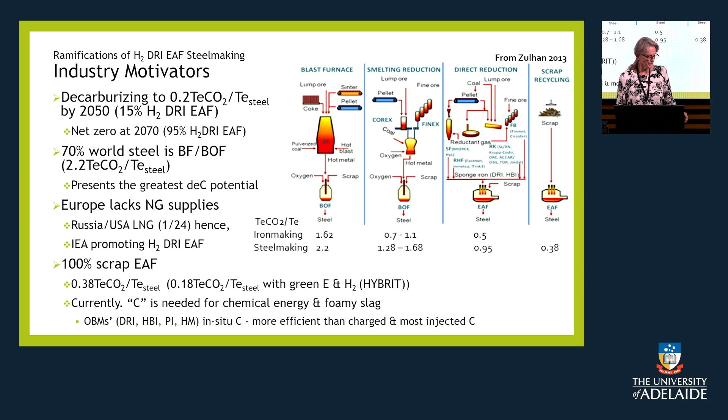100% scrap EAF is challenged moving forward because of the availability of good, clean scrap. So the motivators are producing clean steel through an EAF. There are a lot of blast furnace operators who will challenge whether it can actually be made through an EAF.

You need to maximize scrap to keep your CO2 levels down, and your prime scrap, as you can see from the bottom chart here - the obsolete scrap is going to grow significantly over the years, predominantly because China is going to be dumping between 40 and 500 million tons of scrap into the system, with the requirement to reduce the residuals that are going to be increasing with continuous recycling of the scrap.

We're going to need to use DRI, HBI, and pig iron to basically dilute the residuals coming through in the scrap. The problem is that you're going to have an increasing amount of CO2, as you can see from the middle chart.

As you increase the percentage of the OBMs, you're going to increase your amount of CO2. And pig iron, of course, is a clean source, but that's going to drop from 1.35 billion tons down to about 0.2 billion tons moving forward. So the question will be whether there'll be any pig iron.

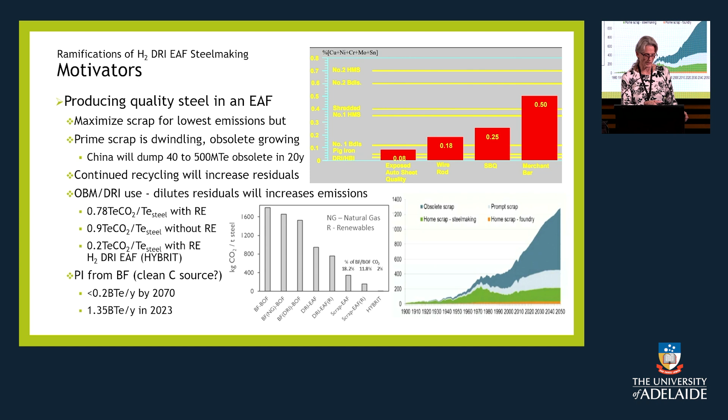It reduces the FeO in not only the DRI that's being fed in, but also the slag. And you can see that it will also decrease the consumables and the cost of making steel.

The in-situ carbon that you find in the OBMs is much more efficient, 95+%. When you've got the injection or charged carbon, you're only getting between 24 and 76% efficiency most of the time from those being added. It's also being added using carrier gases, and you also have all of the sulfur and the bad entities in the carbons.

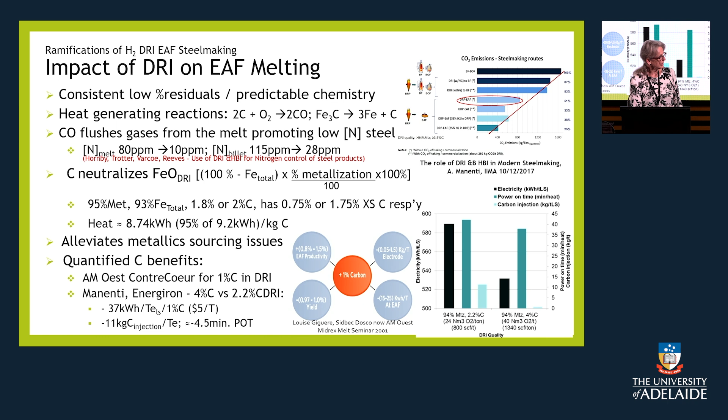The Energiron chart on the right-hand side actually shows a comparison between 4% carbon and 2.2% carbon, and they found a 37 kilowatts per ton reduction using 1% carbon, 11 kilograms of carbon reduction, and also 4.5 minutes off power-on time.

Gangue has a big impact on what happens in the arc furnace, and this is a chart from a paper that David Trotter and I et al. wrote way back when, and it actually quantifies a dollar value for every 0.1% of the gangue that's in an iron. If you add it all together, although you wouldn't have that in a situation, you're looking at close to $1 per percent, $1 per ton if you've got 0.1% of each of these being added to the furnace.

Now, Nucor had shown back when 50% use of DRI could actually reduce some of the kilowatt hours and the tap-to-tap time better than the 100% scrap they were running. Part of this is due to the fact that they had to look at their standard operating practices and improve them significantly. So in most places you won't see this kind of improvement, but they showed a lower meltdown energy, a drop from 421 to 408 kilowatts, and a drop of 61 to 59 minutes in tap time.

In IMEXSA, just as a side note, they showed that there was actually quite a lot of gangue in a scrap charge, and I'll show you how that can be beneficiated a bit later. So that's 4.25% in scrap.

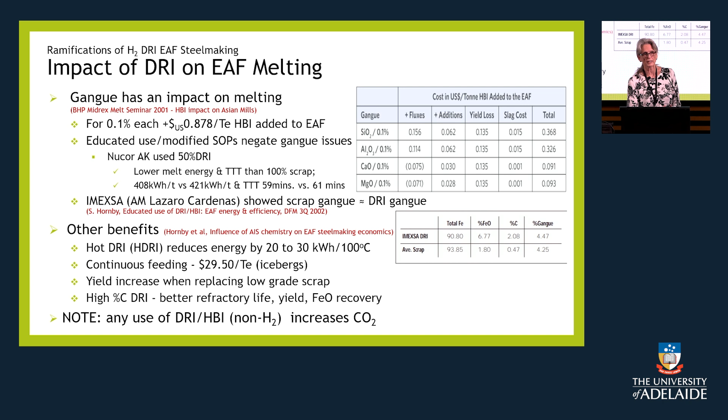Any DRI or HBI, or even pig iron that's put into any system, is going to increase the CO2. So challenges: basically you have zero carbon DRI if you're going to use 100% hydrogen to produce it.

It's going to basically reduce the foamy slag that's in there. It's going to significantly reduce the reaction times that are occurring. You're going to have to put in more slag formers to deal with the gangue. That's going to increase your cost, not only for the slag formers, but also for removing and disposing of the slag. You're going to have no bath stirring, and you're going to have higher kilowatt hours because of that.

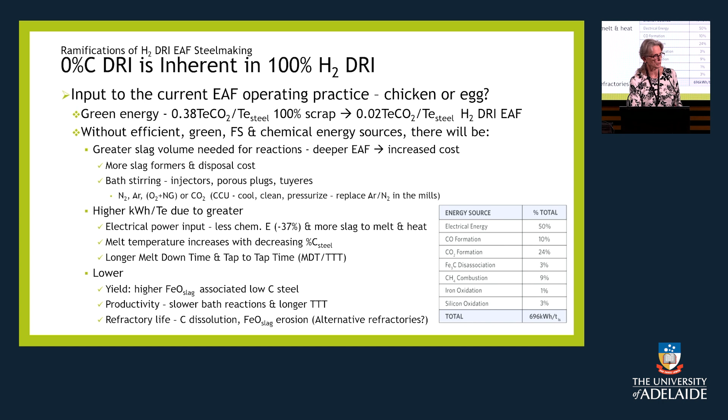You're going to have to physically put in some kind of stirring mechanism to the arc furnaces to enable the reactions to occur. You're going to have much higher kilowatt hours due to the greater electrical power input needed to heat your slag, which is going in at twice the volume. The melt temperature actually increases with lower carbon in the steel. There's also going to be a much longer meltdown time and tap-to-tap time, which is going to lower your yield—and that's a big financial incentive, to increase your yield and throughput productivity.

There were two trials done with the CIRCORED zero carbon HBI that came out of Trinidad at the North Star Steel plant in Texas. Basically, they confirmed all of the thoughts that we had. You need a large heel, continuous feeding.

They needed more kilowatt hours, carbon, oxygen, and pig iron to melt the charge. The oxygen and carbon injection was needed to control the FeO in the slag and in the DRI, and to stir the bath. The higher pig iron was required to help melt efficiently.

They had issues making the low nitrogen requirement from the plant. That was due to the lack of flushing from the CO that wasn't being created. They had to delay the oxygen injection to make sure they could keep the furnace operating properly.

Sorry, I'm looking at the time here. SSAB has actually melted some of the HYBRIT zero carbon product they've produced in Europe, and they melted it in the USA, and they found no problem—but we don't know how much pig iron they were charging at the same time.

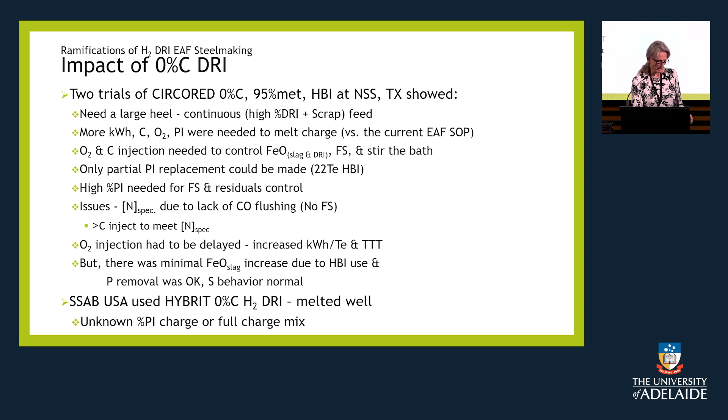Supply is an issue—there's insufficient green power for hydrogen production. 1% of what was produced in 2023 was green. It's expensive, up to $10 per kilogram, which makes it impossible.

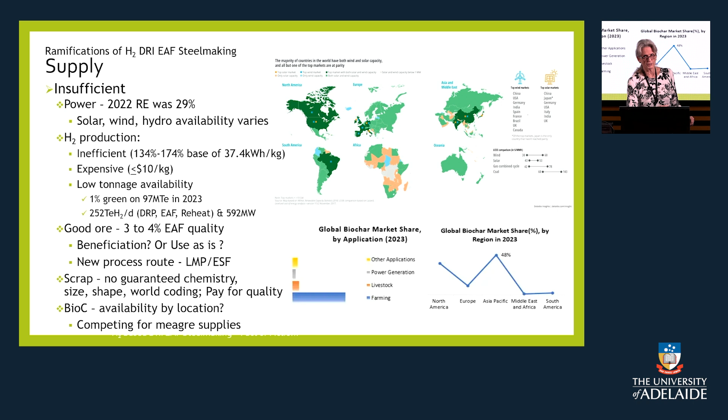I'm going to skip through some of this. Ore is not available—we're saying that only 3 to 4% of the ore is good for DRI production through the EAF, not through the DRI plant. And scrap, of course, the guarantees on chemistry are not always there, and we're going to have more obsolete material moving forward. Biocarbon is going to be an issue. Whilst there are operations out there that supply biocarbon, that's going to probably be insufficient for the future.

Conversion costs is another big issue. The IEA numbers put out from 2015 through 2018—I calculated $1,327 per ton of liquid crude steel. That's much higher than any of the other operations they put out there, the smelt reduction through to the blast furnace BOF. The CRU in Europe actually calculated $3,700 per ton of steel.

So we've got to have some taxes to ensure that the non-compliant, non-green nations are going to pay for not converting, obviously. The ETS in Europe is predicted to be around $128 a ton by 2030, and the CBAM could be $216 a ton.

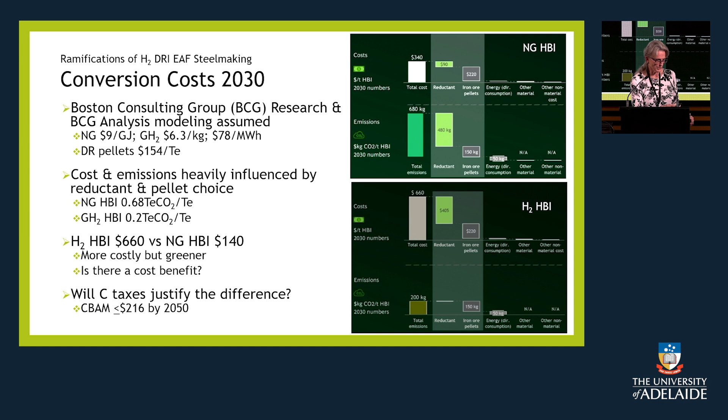Yes, natural gas HBI is down at 0.68 tons of CO2, and green hydrogen is down at 0.2, but you've got a $660 cost for hydrogen DRI versus $140 for natural gas DRI. So the question becomes, are the carbon taxes going to justify the difference in the cost of making hydrogen?

Process enablers - there's a definition there I won't go through, but my perception is that greening the steel industry involves government involvement, with a lot of R&D funding. I don't know much about Australia, but in other parts of the world there seem to be decisions made that are uninformed and based on name recognition rather than actual technical prowess.

Technical education is required. We need more involvement from the technical side of the industry to ensure we have no investments put into non-scalable, non-starters moving forward. This is improving - we've seen a lot of change in the United States in the last 5 years, so hopefully we will solve the problems quicker than expected.

We need to promote and assure, as we've heard over this last couple of conferences, that there needs to be a lot of infrastructure put in place, without which we're not going to be able to move forward. We need rich ore availability if we're going to go through the EAF route. There's high iron ore content in Quebec, but they can't get it to the seaway at an economically viable cost, and several companies have tried.

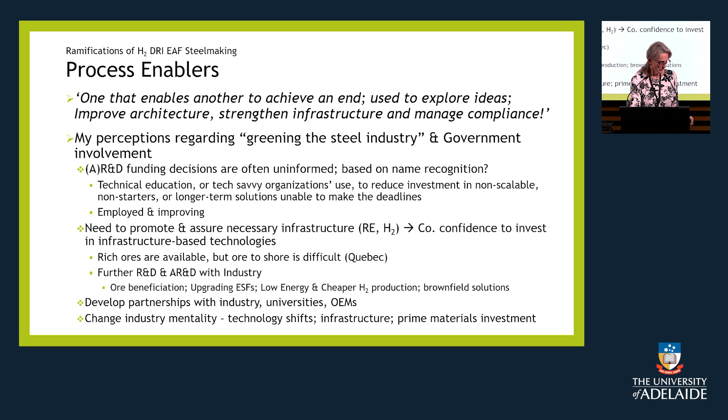I think we also need to look at further R&D with industry, especially not only with green fields but also greening the brownfield sites a little more. Partnerships developing with industry - HILT has a great example of what should and could be done and is being done. I think the other thing we need to do is change the steel industry's mentality - there's a major blockage there to moving forward and changing.

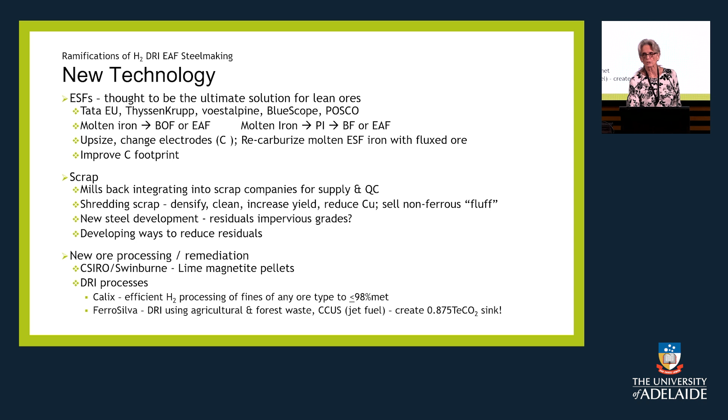New technologies - ESFs are thought to be the solution to the future with the lean ores that are out there. Tata Europe, ThyssenKrupp, Voestalpine, BlueScope and POSCO are looking at this, whether going to the BOF or the EAF, or pig iron to the EAF. But they need to upsize the technology, change the electrodes from carbon, and improve the carbon footprint in general for that technology.

Scrap mills are back-integrating into scrap ownership to ensure quality control and supply moving forward. Shredding scrap has been shown in the UK to densify the material and clean it up to 98% yield from about 89%, which is quite significant. They also managed to reduce the copper contained within the scrap, a significant improvement. They also found a fair, substantial sales value for the fluff coming out of the shredder because of its non-ferrous content.

New ore processing and remediation - CSIRO's got the lime magnetite pellet process that's potentially going to pilot. There's new DRI processes coming from Calix with flash DRI production. There's also a new operator doing a study right now on a 50,000 ton a year plant called FerroSilva - they're going to use biochar from agriculture and forest waste with CCUS, and they believe they'll even have a 0.875 sink for CO2.

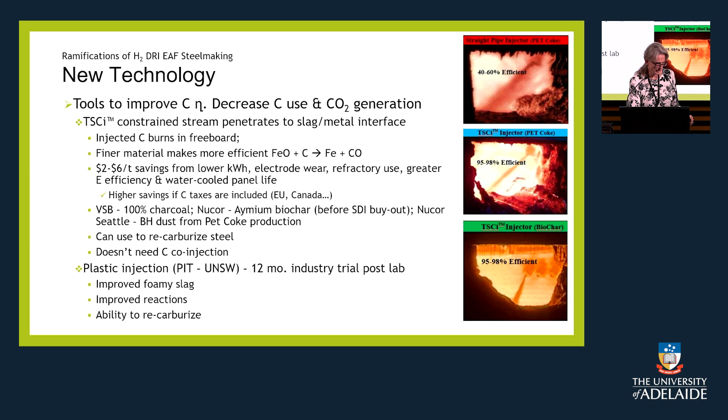New technology tools - I won't go through all of this, but basically Canadian companies found a way of doing supersonic injection of carbon. The finer, the better - they've got up to 98% efficiency with the carbon and with biochar.

In summary, Hydrogen-DRI EAF steelmaking is viable, but moving forward we need lower cost green steel, lower cost green energy, green hydrogen, and better ores that we can put through the EAF. The DRI can go through a DRI plant, no problem - it's the EAF that's the issue. It's going to be uneconomical unless there's a lot of government support moving forward.

Zero carbon is going to mandate significant changes to the standard operating procedures in steel mills. And with less carbon to remove, the EAF emphasis is going to be on slag removal and control of phosphorus and other residuals in the liquid steel.

New technologies are in the wind, and looking at the future, I think we're going to be melting lean ores in an ESF or something similar, or we're going to have to remediate the ores and put that through the EAF with some hydrogen. But the hydrogen needs to be kept to possibly 80% only, which will give us carbon in the DRI plant and will facilitate melting in the EAF.

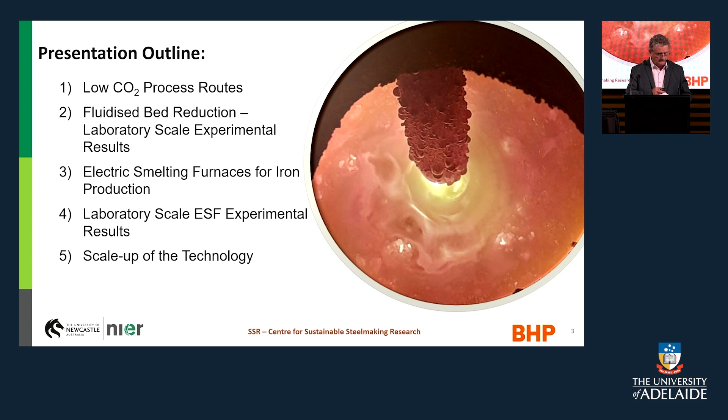So there are some alternatives to do that. One of those, as Sara has told us about, is really to melt scrap. If you've got scrap, by crikey, go for it, because that's the best way to reduce your emissions. But there's just not enough scrap. For the 70% of the steel that is made worldwide not through the electric arc furnace, we've got to do something about that 70%. It's not just about the 30% that goes from scrap melting. So what we're about is the 70% of the problem. That's what we work towards.

And just for you, Mark Pownceby, the geology is important, but so is the metallurgy. The gangue and the slag produced from it is a big part of the story. While the beneficiation crowd want to take out that gangue and throw it on the ground, what we're saying is that direct shipment ores have got a great source of gangue materials in them, and the cement industry wants it. So somewhere there's a happy solution that serves both the iron and steel industry, the iron ore industry, and the cement industry, and what's good for the world in terms of trying to reduce emissions.

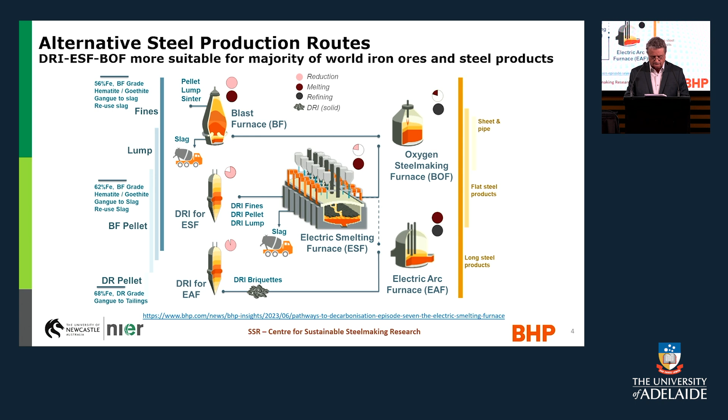And of course, the Boodarie plant had some operational issues which forced its closure. But a lot was learned along the way. The one thing that really sticks out in my mind for that process was really about the yield loss that had to be taken in beneficiation to make such a product, right? What an enormous yield loss. It was so high, I'm not going to say it.

So it really is an interesting point, and I'll come back to it. But the yield loss in beneficiation is a big problem.

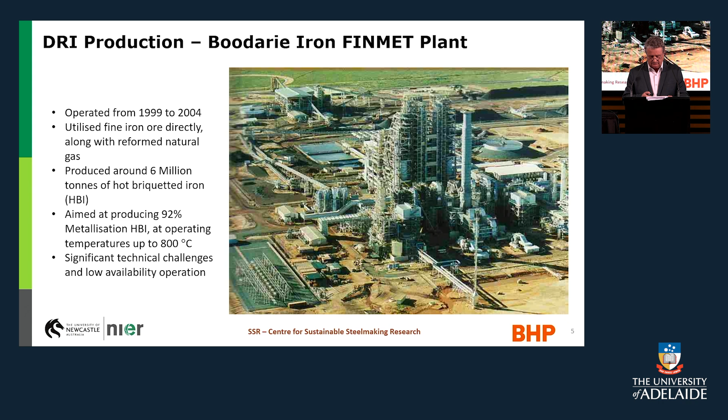The other interesting development on the scene at the moment is the Finex plant with POSCO, and their efforts to change that into the HyREX plant, which is the hydrogen reduction version in fluidised bed. Their objective is to use medium grade ores, around 62%, and put it through their process to avoid that beneficiation step which suffers the yield loss. So for me, David Trotter, dig and ship will be a sensible thing to do for some time to come.

So we've got to work out how to do it. POSCO's Finex process is a good comparison to make with the Finmet plant. But I think the Finex plant, and certainly the HyREX, have perhaps set their targets a little bit lower in terms of running a lower metallisation, which avoids many of those sticking problems that we faced with the Finmet plant.

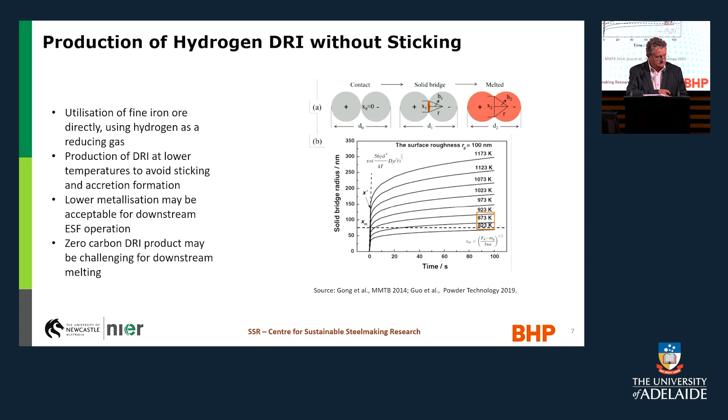And in some ways that spurred us on to try and do some of that hydrogen reduction of iron ore fines directly at University of Newcastle. So we've taken some lessons from Metso and we're doing some of that ourselves now.

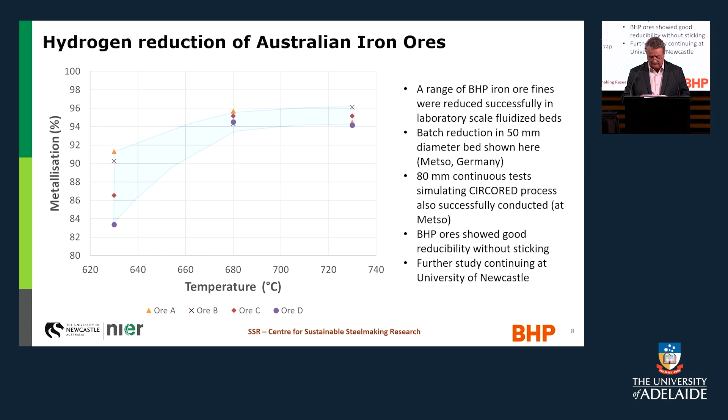Right, so now we get onto the good stuff, which is the smelting part. DRI feeding an ESF to make hot metal may have its place in integrated steelmaking operations. So the integrated steelmakers are interested. It has some advantages for lower grade material and lower metallisations.

It's a low FEO slag process - a little bit higher than blast furnace, but certainly nothing like a steelmaking reactor. The iron yield from mine to steel product is very high, if we take that simple option to handle the gangue by smelting it to a slag. That slag is potentially useful for the cement industry.

The gangue in the ore is a plus. It is a lot better in concrete than it is sitting in a tailings dam.

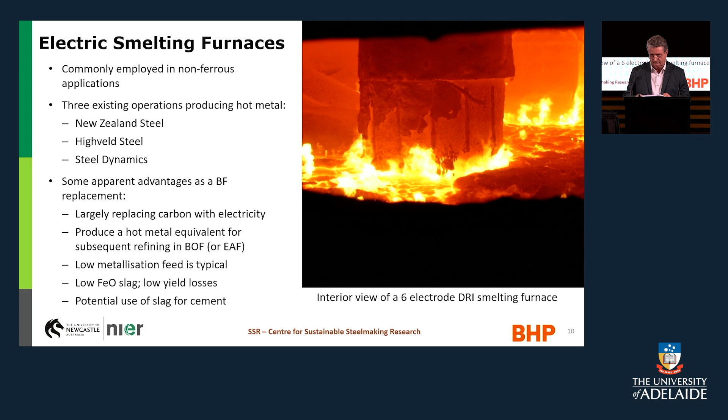Okay, electrode smelting. Tom put up this slide two years ago when he was here, but the key point is that at that time, and probably still now, there were really only three real examples of electric smelting furnaces to make hot metal: the New Zealand Steel operation, the one that was Highveld Robusteel, and the one at Steel Dynamics, Indiana. So these three guys know something about it, and the New Zealand Steel furnace in particular is one that I know something about, having worked there for quite a few years.

The last key point is that we can handle a big slag volume, so if we've got lots of gangue in the ore, we can handle the slag quantities. Typically New Zealand Steel runs 400 kilograms per tonne hot metal, Highveld was at 1,000, and Steel Dynamics is quite a special operation - they run around 70.

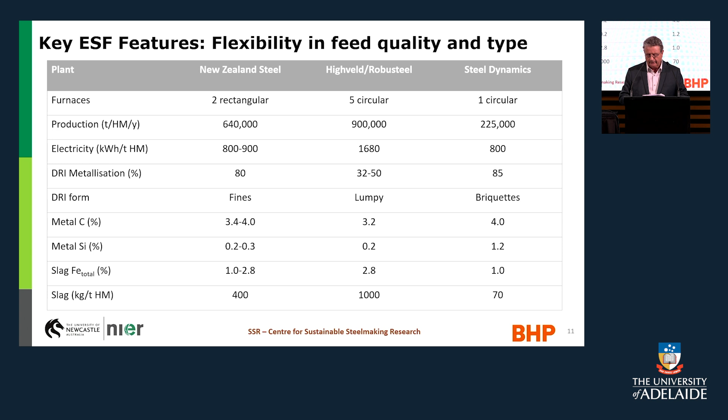So there's a lot of interest. Electrode smelting at laboratory scale - holy hell, that's a bit of a challenge. So how do you do that?

Electrode smelting has its key feature in that the heating is from the reactor centre out to the sidewall, whereas most of our high temperature experiments done along the way have been in tube furnaces or induction furnaces where the heating mechanism is from sidewall to centre. So those furnaces are not what you want when you're trying to study an electrode smelting furnace - electrode smelting is heating centre to sidewall.

That's what we've tried to do in our test work at University of Newcastle. We started small, which I talked about a couple of years ago at the last Newcastle symposium. We started out with wire feeding in a welding circuit type operation, but quite quickly we progressed to trying to work with an actual carbon electrode, DC electrode, single electrode, and now we're up to around 5 or 6 kilograms as our charge size, and we're able to do it quite successfully.

Of course, with electrode smelting, because you're heating in this mode of electrode centre to sidewall, the temperature gradients in the smelting reactor are really very large - laterally from centre to sidewall and also from top to bottom. That's what we try to deal with. Being a pyrometallurgist, people always say 'what temperature did you do it at?' And I say, well mate, it's just a reactor full of very big temperature gradients. So to talk about a single temperature is really a bit of a false argument - you're dealing with a smelting system that covers a very wide range of temperature.

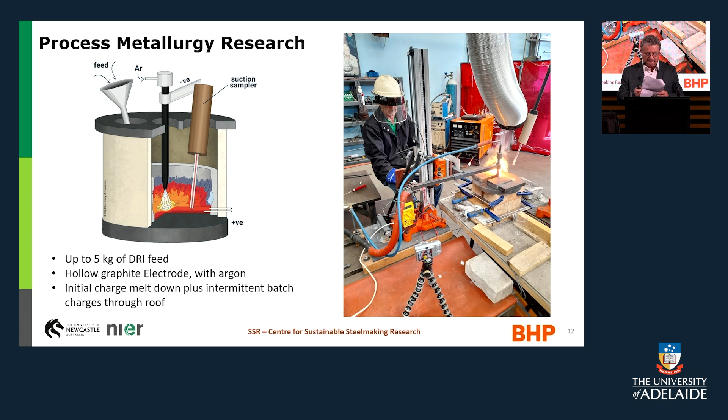We start with a cold charge, fill up the reactor volume, strike up that arc, and find that we get a molten pool very rapidly, within 10 minutes. Then the temperature stabilises a little bit, and we're able to do some extra top feeding, which in some ways simulates a real-scale electric smelting furnace. We're able to take metal and slag samples in situ as we progress through a run. So we're doing all these things - it's an exciting experiment, and we've done about 60 of them now, so we're getting good at it.

Oh okay, Tom has animated this one, so there's a bit of animation for you.

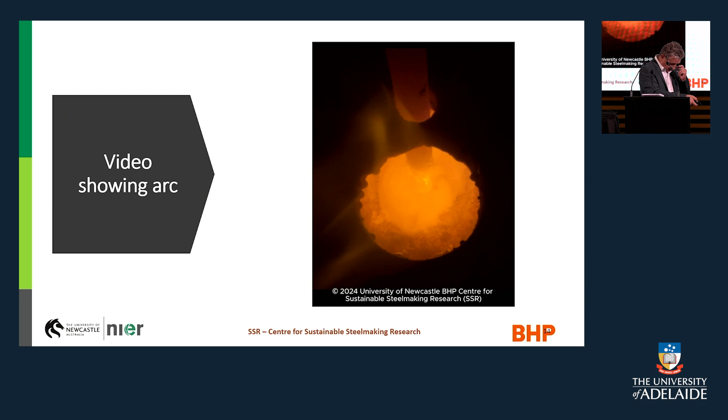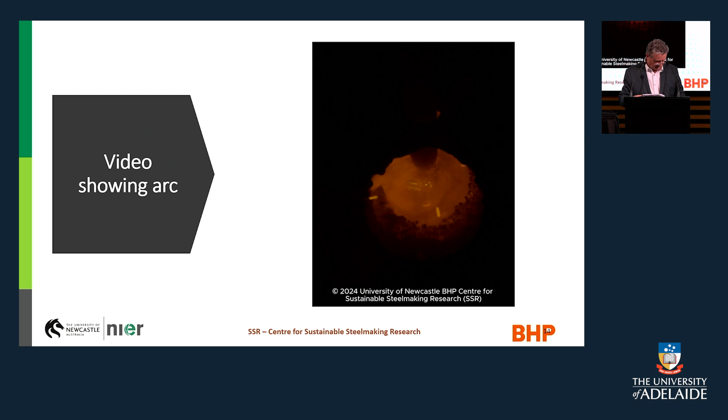Some of us are brave enough to put our phones in there and try to take a picture. Let's see if I can make this thing go. There you go, there we are looking inside that furnace. You can see the electrode there that's immersed in the slag layer, and you can see the arc sparking around underneath. It's quite a thrilling thing to look at when you're trying to do it.

But immersed electrode smelting, we're able to do this. So it's not just about striking up a plasma arc on top of a slag, it's actually that we're able to turn off the plasma and do some submerged arc smelting. Real process stuff, so it's good stuff.

So the Hydrogen-DRI that we're now making at University of Newcastle, we set out on that mission specifically so we could have something to feed this electrode smelting furnace. For some of you down the journey, you'll know that if you want to smelt this stuff, you've got to be able to make it. And there are some challenges just to make it.

The hydrogen costs money, and if you go too big in your reactor size, it's going to cost you a lot of money. So at 5 or 6 kilograms charge size, this is okay, we can manage that money required. So we do this, and this size is convenient, you can do a lot of tests in a short amount of time. You don't need to get all the various company interests talking on the same stage to agree what you should do. So we're doing our own thing, and that's what we do. For the moment we keep going, and we're going flat out.

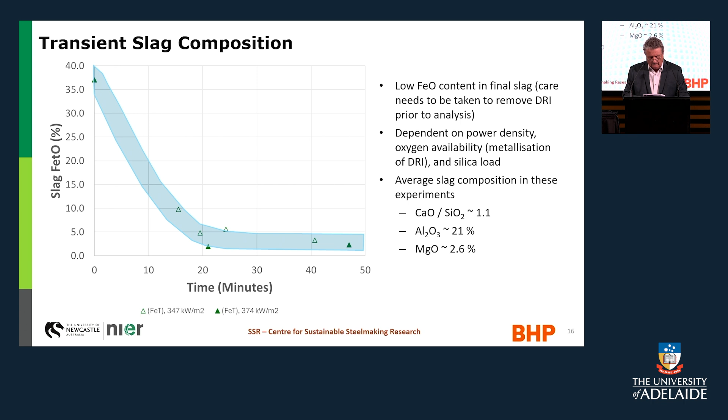We've done some stuff at a little bit bigger scale. In March this year, we spent a good month at Aachen University in Germany. As it turned out, we had made some hydrogen-reduced DRI fines in Frankfurt the year before, so we had some material left over, and we said let's just try to smelt it in Germany because it's too hard to try to ship it back to Australia. So we did that, took it there.

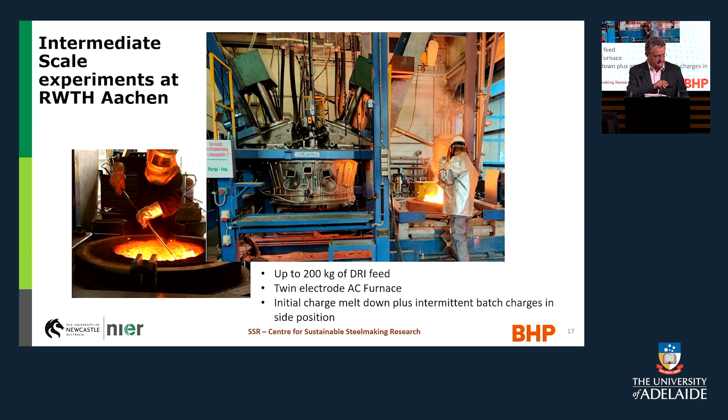The Aachen journey was interesting. It's a twin electrode AC furnace, 120 to 200 kilogram size. We learned some interesting things there and came away with a set of results, and basically we need to go back and do some more work. But there's probably enough encouragement in the results we did get to say that we should go back. So after they've done some extra things to improve their off-gas system, we probably will go back and do some more.

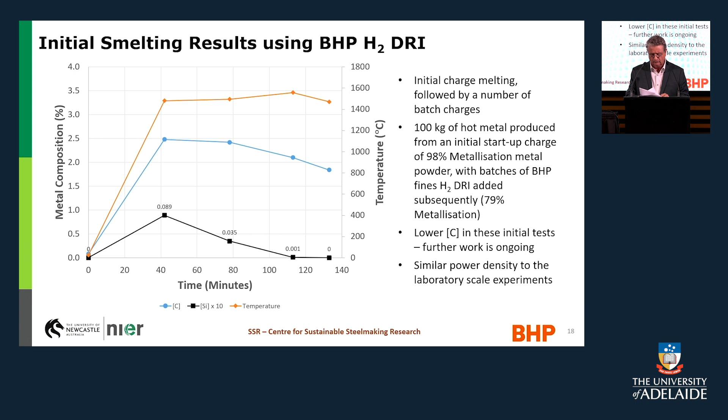So just to refresh, we've started at lab scale, we've done a bit of intermediate scale, we'd like to do more. And of course there are those other activities happening at the larger pilot scale and demonstration scale. We're also involved in those, and whatever we learn at the smaller scale, we want to take some of those lessons into the bigger scales.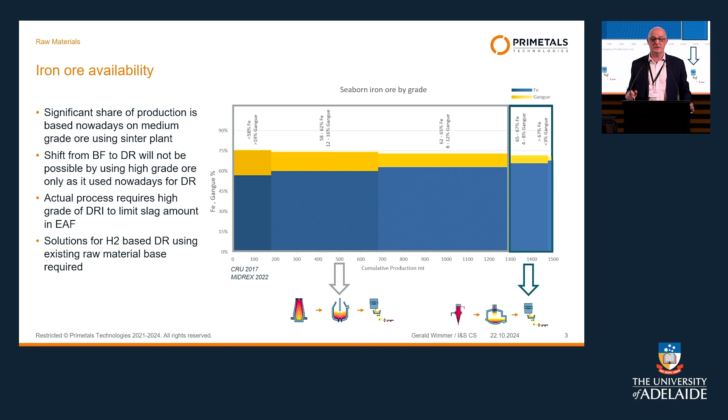I like this slide in two directions, because it's very easy, very common to read it downwards, in the sense that it says: got this material, this is how you should process it. But it also works upwards as well: got this flow sheet, this is the sort of material that you need. But what we do need then, moving forward, echoing the theme of my predecessors, is a solution for poor quality raw materials and the shaft DR furnace.

To do that - the one-step process that is well accepted with high quality iron ores, where we can process in a shaft furnace and go straight to electric arc furnace - is not going to work with low quality raw materials. That's why I then make my point of a two-step process, a two-stage process. I then introduce the smelter.

That we've been referring to on and off for the last few minutes. So in my flow sheet then, I've got a shaft-based DR system processing low, medium quality raw materials. The product passes through the smelter, and the molten material from the smelter then gets transferred to a BOF.

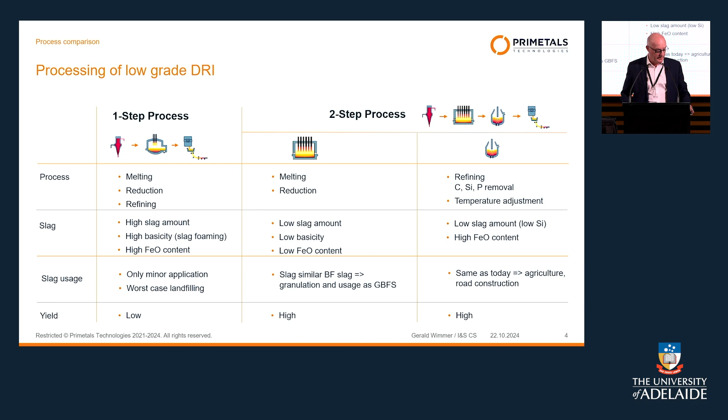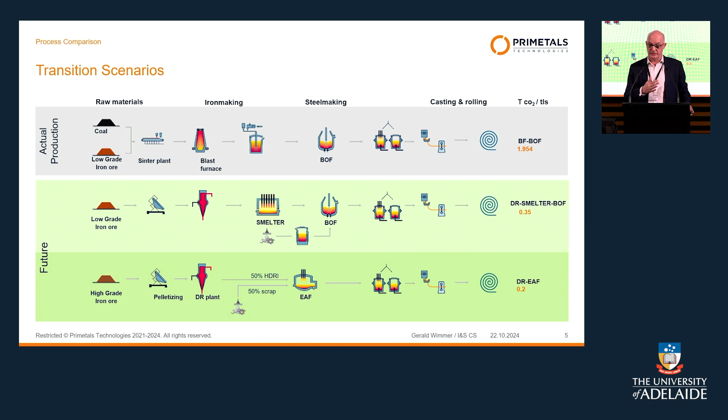Transitions, I'll show very quickly on this slide. The grey at the top is our established blast furnace BOF route, and we can transition to the two options. But the advantage of going from traditional blast furnace BOF to smelter BOF is that we can retain the BOF in our flow sheet. That offers advantages for secondary steelmaking systems based upon a particular heat size that matches with a casting machine. All of this is being retained, stating the bleeding obvious, isn't having to be changed at greater expense than we're already facing.

If I look at the smelter then - having gone through my set-the-scene introduction, a little bit more detail about how we see the smelter working - so on this slide, I've got inputs and outputs.

Obviously we're focused on getting the DR, but what we really want to do in the flow sheet we envisage is have a hot DR connection, and that offers some strong thermal benefits to the performance of the smelter. You'll also notice I'm capping the cold materials I'm adding, like the cold scrap and the cold DRI, because it just impacts on the thermal balance we see. I wouldn't see these numbers as absolute - the world won't end if you go to 11% on a basis - but it gives us some logic to how we can set the system up.

This process with the smelter is going to be a reducing process. That, to me, when I thought initially about the traditional electric arc furnace and what we're looking at here, is the big difference as I see it. That's the thing I focus on a lot, how it's going to work, and it offers advantages as well. But we're producing a reducing gas - I've got some ideas on gas cleaning on a subsequent slide. We're also producing a liquid metallic product, which I've mentioned already, but also a liquid slag, which can be used with a granulating system to produce cement-grade material.

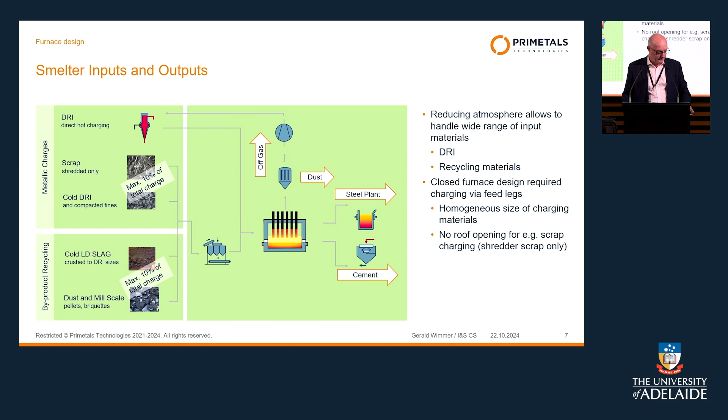Thinking about the size of the smelter, it's got to match the size of the DR unit. I've got a range of DR modules shown here, matching them with various sizes of smelter. The key point is that up to about 2.5 million tons per year on the shaft furnace, you're going to need 2 modules of smelter, because that's the size we think we can get to at the moment.

But history has told us already that the limits we put in place, we've already broken them. 100 years ago, you'd never have a blast furnace bigger than 500 cubic meters, and look where we are now. So I give you those limits today, but I fully expect in the years to come we can challenge and exceed them.

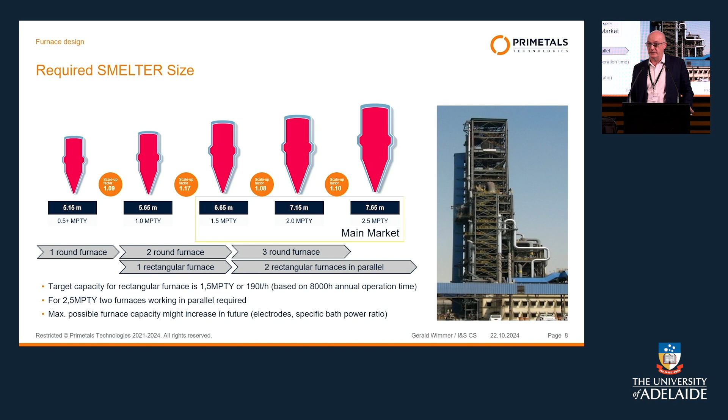If you look at this slide, it's a nice 3D image of what a DR smelter combination would look like - this is like a 2.5 million ton per year DR facility. I've got two smelters shown on the drawing, and it's also showing a hot connection, so we go direct from the DR system straight into the smelter through some feed systems.

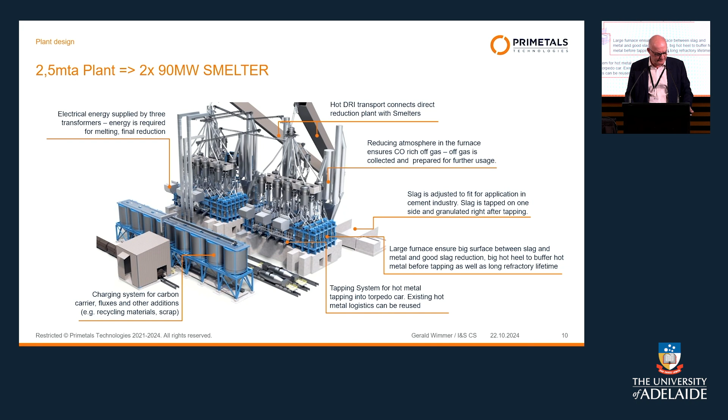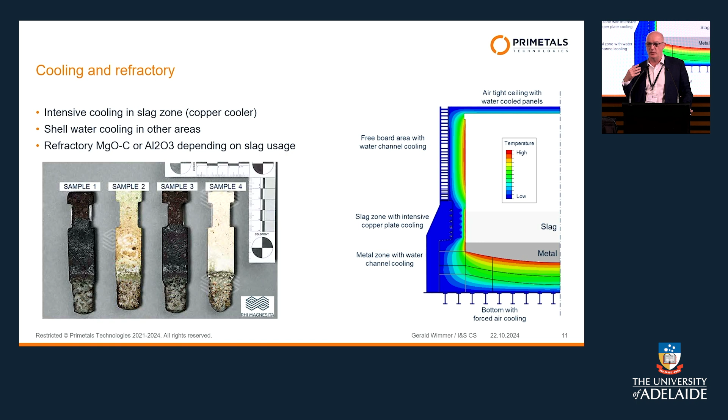It's just a consideration of risk - how dangerous would it be if we had a breakout at the bottom with water there that we can't get to. Risk keeps coming up again, and this is our example of risk management - something we're concerned about, and this is how we want to handle it.

I mentioned the gas cleaning - a reducing atmosphere in the smelter, like I said, so we can produce a gas that we can collect and use as a fuel. The upper half of my slide shows a BOF LD gas recovery system where we can switch over when the gas conditions are right - we can collect the gas and use it as fuel, and when they're not right, we can flare the gas. On the bottom half of the slide, we've got heat recovery - instead of collecting the gas, we just burn it, generate as much heat as we can, and use that heat to generate some energy, steam, or steam directly into electricity. So we've got options there that go beyond the smelter itself to make the flow sheet more interesting.

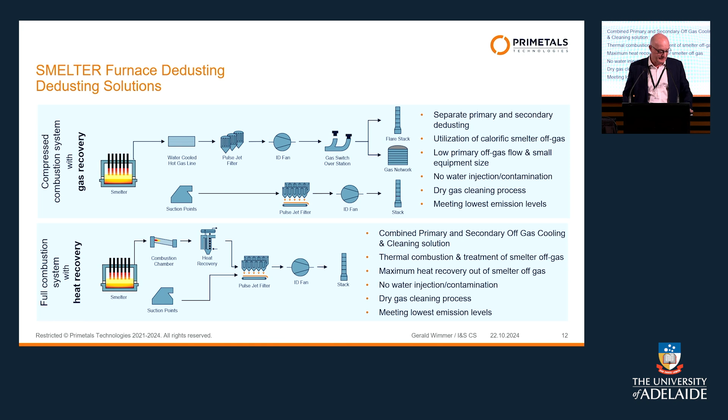So I need to wrap up. My conclusion: the transition has started, as we see it.

In the last few weeks, we've had contracts with Dillinger and Blaster for various types of Midrex units. Blaster is hydrogen-based, and Dillinger is a Midrex flex, so it's got the facility to change from natural gas through to hydrogen. We see hydrogen-based direct reduction as an important part of the next step for the industry. We want to be there.

I'm here as a technologist. I feel as if I'm a rare part of the audience here, but that's what I need to do. I need to sell my technology to my customers, and we want to have the variable or various options necessary to satisfy all the different customers that we're going to need. A lot of what my customers will have to deal with will contain gangue materials.

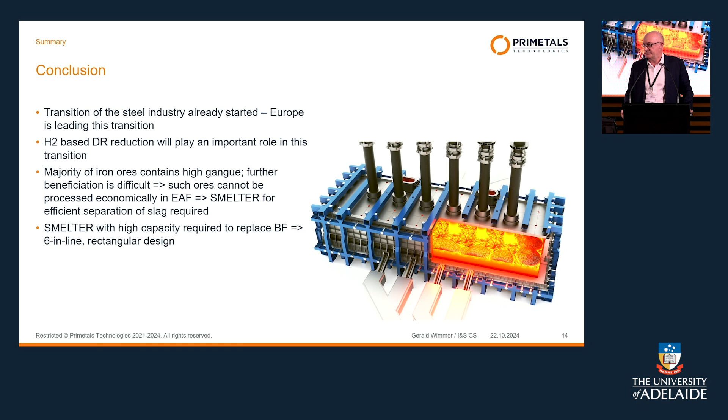The answer is the smelter. And that smelter, we see it as a high-capacity unit to replace the blast furnace. Very quickly, I hope you've got a feel for at least where we see the smelter in the future of the business.

Sorry, just a little bit.

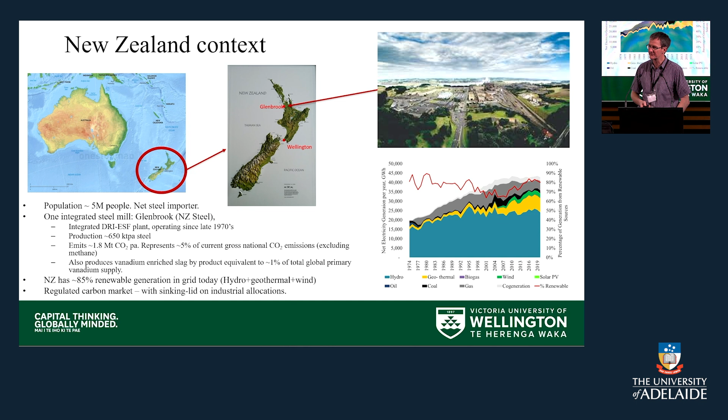We're situated in a country which has about 85% integrated renewables in our grid already, with several gigawatts of known wind and geothermal available for further installations. So in the context of electrification of industrial processes, New Zealand's quite an interesting place to be. And we have an ETS, which has a carbon price and a sinking lid on industrial allocations, all of which is interesting. But we work with a very unusual iron ore.

In New Zealand, our iron ore is an iron sand, a beach sand. You can find it all the way down the west coast of the North Island, and it's a titanomagnetite - it's got about 8% titanium in it, and that is substituted into the lattice. You can't leach it out, you can't wash it out. It's inside that magnetite spinel lattice, which means you have to process it pyrometallurgically.

One of the nice things about it is that as a beach sand, it's a bunch of very spherical, quite homogeneous particles, and that'll come up again later. The sea has done all the work for us - we didn't do this, it's a couple of millennia of the sea just wandering around. There's a modest amount in a couple of existing mines, but there's an awful lot sitting as sands off the coast of New Zealand, and we are interested in the ability to unlock that as a commercial opportunity.

But that titanium is a problem. You can't put it in a blast furnace. We've known that for a long time. The first 100 years of history of steelmaking in New Zealand was abject failure. We got to 1950, post-war, and the government put some money in and said we need to do this properly. And they developed a process called the New Zealand Steel Process. And that's what's at Glenbrook now. It is a DRI, ESF, and at the moment, BOF process. So we've had a lot of people talking about potential systems, and that's where the steel industry might be going. New Zealand's been doing this for nearly 50 years.

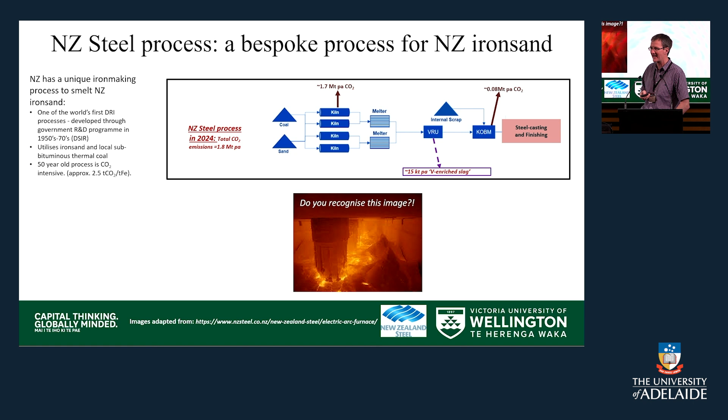Then those melters go through a unit called a vanadium recovery unit, and that's kind of important for us. We've got about 0.5% of vanadium pentoxide in the original titanomagnetite. And that vanadium recovery unit takes off a vanadium-enriched slag, which is about 1 to 1.5% of the world's primary vanadium supply from this little tiny steel plant.

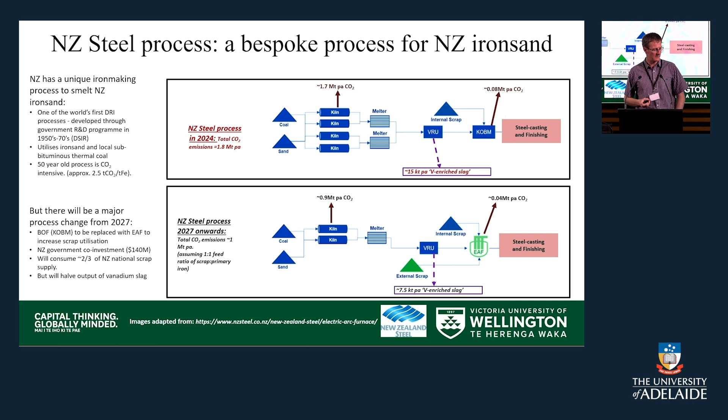And that's relevant too, because what New Zealand Steel and BlueScope are about to do is put in an electric arc furnace into this system so they can increase the scrap utilisation, which is great from a CO2 perspective, but it means we're putting half as much iron sand in, which means it's putting half as much vanadium in, producing half as much vanadium-enriched slag. Vanadium is a critical metal. It would be ideal if we weren't doing that, but from a dollar's perspective, it doesn't make much sense to do anything else.

So the question is: is there a future for a hydrogen-DRI in this system? We've got a beautiful modular system already. In principle, we could delete the coal and kilns and put in a hydrogen-DRI reactor, and then the ESF is there, and away we go. So that all sounds great, but we've got this weird material that no one else has looked at, and so fundamentally there's some R&D that needs to be done. And that has been the focus of our work over the last 4 or 5 years.

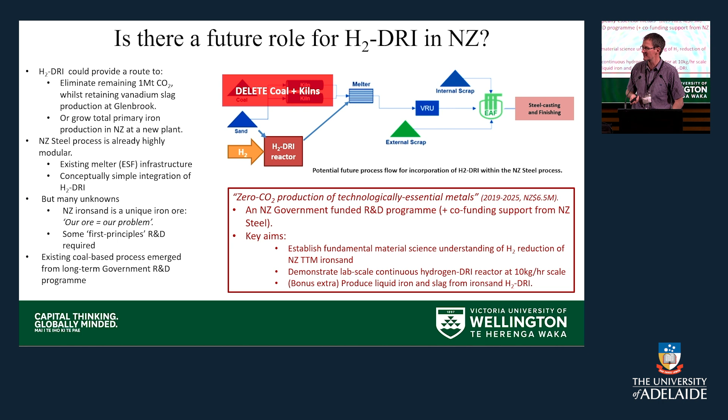Before I move on from this slide, one thing I'll come back to later in the talk, as long as I have time, is to note that that hydrogen-DRI reactor just shows hydrogen coming in, and I've ignored the rest of the system. It's really important to remember that any of these H2-DRI systems need a hydrogen recycle system, and I'll talk more about that later.

Another thing that's really important to bear in mind when we're talking about research and then trying to join it up to industry is just scale. It's really easy to get lost in scale when we're having talks that span from materials science through to large-scale industry and engineering. There's a scale of 1 million between some of the experiments we do in our lab and what is practically required at the industrial scale. That means you need to be clear about what you are and aren't studying when you're looking at these systems.

So in the sort of context we're operating in over here, our R&D is largely about a fundamental understanding of materials behavior, fundamental understanding of chemical reactions, fundamental data which can feed models. What we are not doing is validation of heat and energy balances. We're not doing specific technology validation. That requires a lot more money and, to be honest, a lot more hydrogen.

So down here, we're able to operate with 1 or 2 bottles. These units here are all test units in our lab. We've got a vertical shaft reactor, a batch reactor, and a test fluidized bed reactor, and we're building a bigger fluidized bed reactor at the moment. These systems are all able to run on bottles of hydrogen, either a single bottle for very small systems or a multi-bottle, 4-bottle manifold, which is what we tend to run over here.

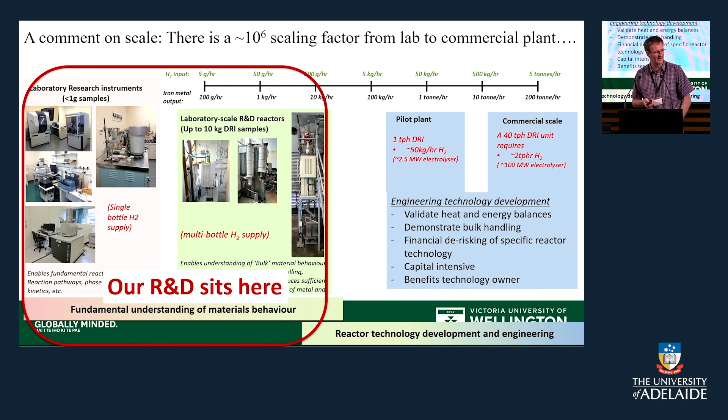The moment we move up above this sort of 10 kilogram an hour of DRI samples is the moment we are moving into large amounts of hydrogen. You are talking about a tube trailer or a dedicated electrolyzer pretty quickly. And so that becomes a significant percentage of the total investment required for any plant. And it's another reason why you're moving out of what would be considered an R&D environment and very much into bespoke technology development.

So we've got 2 separate streams going on at the moment in terms of the program. We started off looking at pelletization. It's a nice, easy process to use. In principle, it's well established, and it should be relatively forgiving for a large range of different materials.

And we've also been looking at fluidized bed for the obvious reason that those beautiful spherical particles I showed you earlier fluidize very nicely. We've got various capabilities in the lab, and this slide is largely just to publicise to the researchers in the room that we have this equipment, and please come and talk to us about using it.

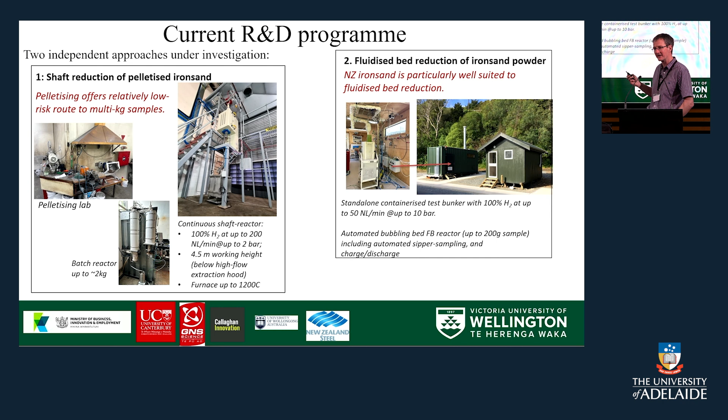Right, so I'm going to very quickly skip through some data. I know there's a lot of people here who are not technical people in the room, so we'll just move very quickly.

But just talking about moving through some of the scales, some of the early work we've done is looking at pellet scale work and looking at kinetics. You'd be stunned to realise that these reactions go very fast. Hydrogen is a very small, zippy molecule. It reacts very quickly with other things. So we see shrinking core type kinetics in our systems, and we can identify kinetic models.

What's interesting, of course, is the moment we move to a larger reactor to make material that we can test for other purposes, we then start to move in fixed bed reactor dynamics, and so what we actually see is a reaction front and often channeling between the pellets. That's a function of being at this intermediate scale, which is not a proper reactor and not a single experiment, not a single pellet either.

But that does allow us to make enough material to do other tests. So this is some data that Sara, one of my PhD students, was showing in the poster session. You may already have seen it if you talked to her.

But we've been able to look at generating large numbers of pellets and doing ex situ strength tests. And one of the things we find about this particular material is that because we've got all this titanium that we exsolve as we reduce the pellets, what we do is we form this very brittle ceramic structure inside the pellets, which means that our pellets undergo brittle failure even when they're fully metallized, which is not ideal if you were looking at something that you want to briquette at a later point.

So we moved on, and we've also looked at making larger quantities of this in the vertical shaft, and then we've taken this to Newcastle. I want to thank Tom and Craig in particular for doing some melting studies.

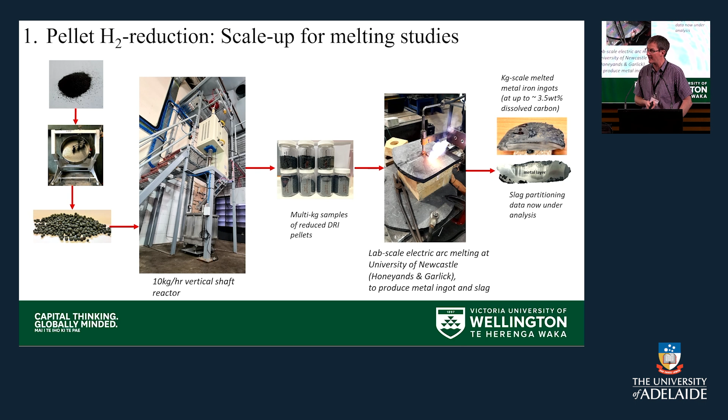We've got a lot more data that I haven't shown here yet, looking at partitioning, looking at slag partitioning, and the ability to melt material that's coming out of our reactors and confirm that it will go through an EAF and it will incorporate carbon.

But just moving quickly, we've also done quite a bit of work on fluidized bed reduction. This is showing our material fluidizing. It's a beautiful material to fluidize. It's got nice high density, 5 grams per centimeter cubed, nice and round.

And that allows us to put reasonable amounts of hydrogen through it, and we can do some process mineralogy, because both minerals and metallurgy matters. And when we do that, what we see is that we have a system where we form this system.

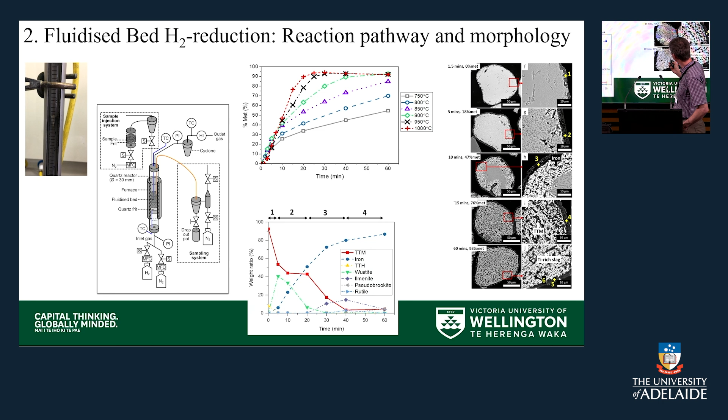And we can react it at very high temperatures, because as it reduces, it forms a titanium-rich skin around the outside. And so this is a situation where our contaminants are actually helping us. They're making it easier for us to run this reaction because they're coating the outside of the particles and they're preventing us forming wet liquid metal on the surface of the particles, which would otherwise make it stick.

If you tried to do this with a Pilbara hematite, once you got up to about 900 C, this stuff would start to stick. But we're still going at 1050, no problem, which means that we can access really rapid reactions. Building a reactor you can run at that temperature is a secondary question, but the fact that it works is really encouraging.

Here we go. Here's a picture just showing the titanium-rich shells on the outside of those particles.

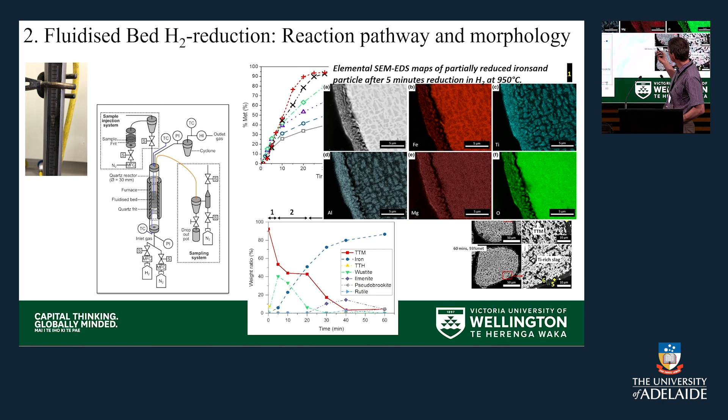So just to move quickly on another point: one thing we find in our fluidized bed reactor is that at these higher temperatures, when running a batch reaction, we hit a stable water output. That's because we're running at the boundary between the iron-Wüstite phase. We've effectively hit thermodynamic equilibrium, even though our test reactor only has about 40 millimeters of bed height and a gas residence time of a few hundred milliseconds. That's enough to reach gas equilibrium, showing this is a very rapid reaction.

This has ramifications for downstream design. It also means our reaction rate isn't kinetically limited at all - it's just limited by how much hydrogen we put in. So it doesn't matter whether you vary hydrogen concentration, particle sizes, or bed masses - you get the same answer. It's stoichiometrically sitting at this boundary until you add enough hydrogen to complete the reaction, which makes some of the modelling fairly easy.

So I want to finish with some takeaway thoughts. Here's a model I discussed earlier with a hydrogen recycle loop. This bit matters: if you're sitting at your thermodynamic boundary, that's about 35% utilization for a cross-flow system or 50% for a counterflow system. The rest of that is hydrogen - you cannot throw that away, you cannot afford to throw that away. You have to recycle it.

So you need a condensing heat exchanger, which in principle sounds reasonable, but it needs to handle relatively high flows of material. Particularly if your utilization rate isn't high, these can get really big - hundreds of square meters of heat exchanger per ton, which is quite large. So bearing in mind that gas utilization really matters is something that's come out of our modelling work, and I think it's more generally applicable outside of what we're doing.

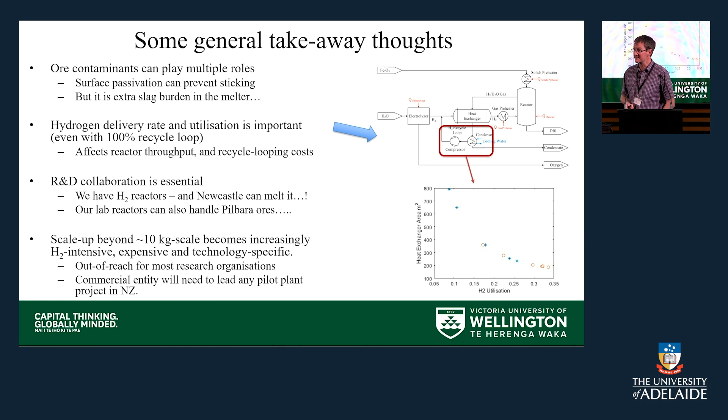Other thoughts worth mentioning: ore contaminants aren't always terrible. Yes, they add more gangue load to downstream melting, but they can help in certain powder processes. Collaboration is essential, and scaling up beyond the 10 kilogram scale we're running in our labs is expensive for reasons we've previously discussed. Certainly in the New Zealand context, it's out of reach for most new research organisations and will require technology providers to lead. Thank you.

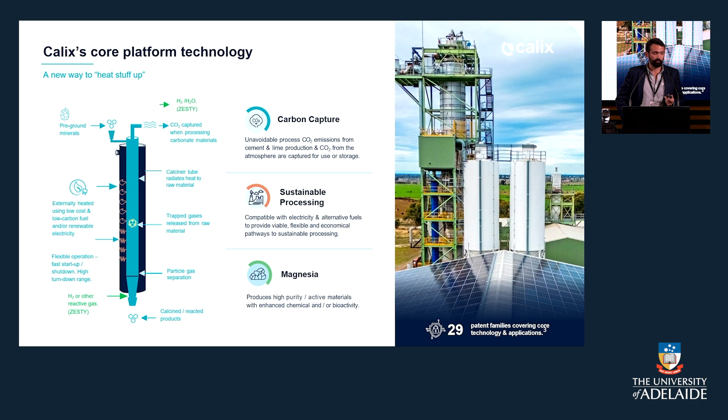So there are several applications for this single platform technology, and we're applying it within cement and lime, for direct air capture applications, for the processing of hard rock lithium ores, alumina processing, and iron and steel. I'll go through several of the projects with which we're scaling the technology.

The first is the Sustainable Lithium Demonstration Plant, which Calix and Pilbara Minerals, a lithium miner in Western Australia, are progressing through a JV at their mine site in Pilgangoora. This plant is designed to process spodumene, a hard rock aluminosilicate lithium ore. It flash calcines the spodumene to effect a phase transformation that pops open the structure, allowing us to process it using hydrometallurgical processes to remove the lithium and convert it to a salt.

That's one of the projects we're doing. It's a 30,000 tonne per annum site, currently under construction, and the project objectives are to reduce carbon intensity and reduce transport costs. Life cycle assessment studies have found that renewable-powered electrical calcination of spodumene would reduce emissions by 90% compared to a conventional coal-fired rotary kiln, and 80% versus a natural gas fired rotary kiln. We're also planning to demonstrate lower capex and opex costs relative to rotary kiln processing, and producing a higher value lithium product onshore rather than shipping the spodumene offshore to China. Construction has commenced, and we're targeting production of the lithium salt next year.

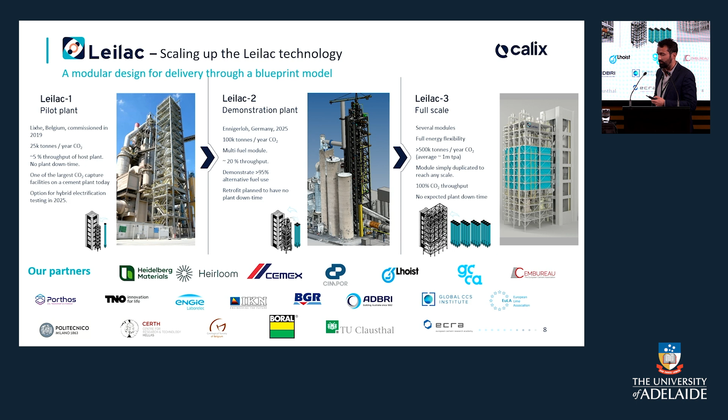Okay, so the next technology is our zero emissions steel technology, or iron and steel technology. I went through a little bit about this earlier, but the key benefits of this technology are it's renewably powered and flexible operation. The system, including the reactor, can be powered entirely by renewable electricity. There's no fluidized bed, so it's a lot simpler than a fluidized bed operation.

We're targeting minimum hydrogen consumption. By that, I mean we're able to provide all of the energy input for the heating through the walls, so we don't need to combust any of the hydrogen within the process. The demonstration plant will include hydrogen recycle. We're processing lower grade ore, down to about 53% iron in our process. We're processing iron ore fines, so no pelletization is required, and we're developing a scalable and flexible solution to scaling the technology to various different scales.

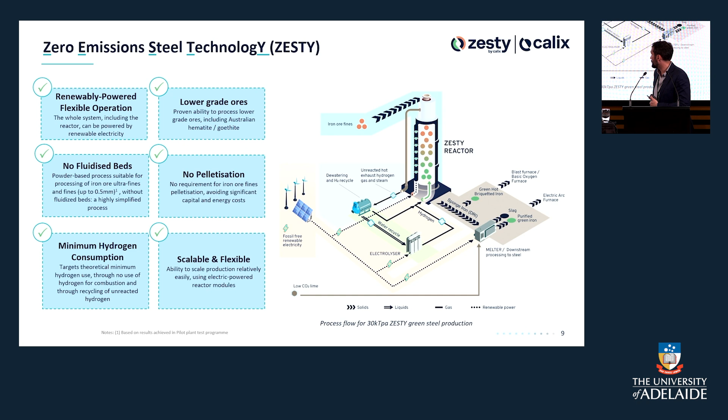This schematic shows the 30,000 tonne per annum demonstration plant that we're progressing. We've completed a FEED study for a 30,000 tonne per annum zesty demonstration facility, and completed an extended ore testing program, with over 130 tests on 9 Australian iron ores. We've been able to produce very high metallizations in excess of 95%.

We just mentioned that this is within our pilot facility, so this wasn't designed for the zesty process. It was a much shorter tube. The full-scale plant will be much larger.

Finally, techno-economic analysis has shown that low-carbon HBI from Australian iron ores is competitive with, or close to, current HBI market prices.

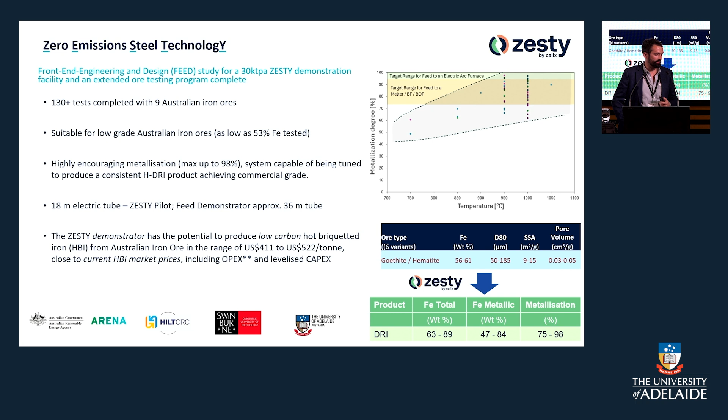Finally is the alumina calcination process. We've completed pilot plant trials on this study, and also been working with HILT CRC to assess the technology relative to other calcination technologies, finding that direct electrification of alumina calcination potentially offers the lowest energy intensity process.

As I mentioned, we've tested multiple different sources of gibbsite. We've achieved smelter-grade alumina specifications, achieved very high concentrations of steam, compatible with steam reutilization, mechanical vapor recompression, etc. And we're now seeking support from industry partners to support the scale-up, commercialization and demonstration of the technology at the next scale.

So I've run out of time, but essentially we're progressing this technology. We're moving through to demonstrators on multiple different scales, and we need your support. We need industry-wide collaboration, continued investment into low-carbon technologies such as the Calix technology.

One of the challenges we're facing, particularly with the zesty demonstrator, is identifying sites that have the renewable energy supply and hydrogen supply that we need. So support for enabling renewable energy infrastructure, green hydrogen, and technology access.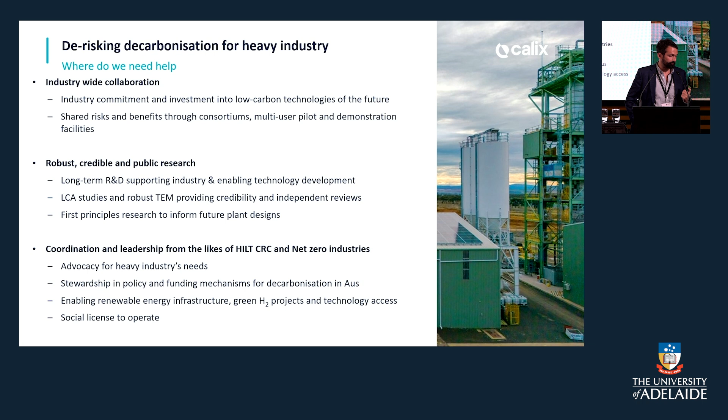Just a quick promo for some of the other talks going into more detail on specific applications. We've got Simon Thompson speaking tomorrow on the electric calcination technology and its applications for direct air capture, which I didn't really cover today. And then Sara from Swinburne University of Technology, who we've been working with through HILT and Swinburne and University of Adelaide, will provide an update on the extended ore testing program we undertook with HILT.

Yeah, I think I'll leave it there. Thank you very much.

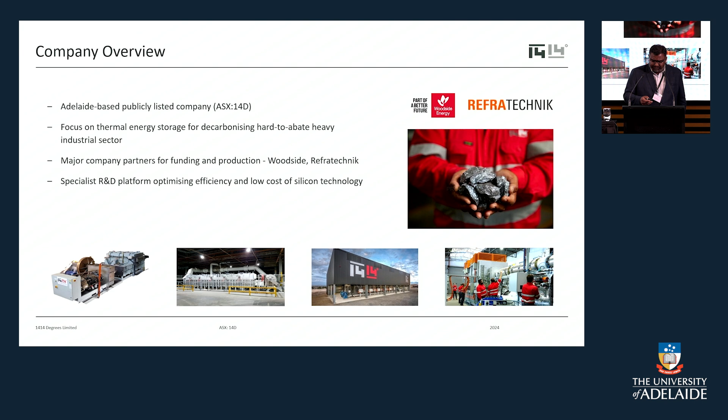Yesterday I was thinking about this presentation, and a lot has been said in the last two days regarding the need for thermal storage. So I've basically removed half of my slides because I don't need to go through the importance of thermal storage in heavy industries.

I wanted to talk about the bricks that we've developed - that's our thermal storage media. I also thought it's much easier to actually bring one of these over and show you guys. So if you're interested after the talk, they're lying in my backpack - just a couple of sample bricks I carry around.

I want to go through the journey we've taken in the last 10 or so years as a thermal energy storage developer. The technology has its roots in CSIRO. The first system envisioned was a concentrated solar thermal parabolic dish system with graphite encapsulating pure silicon as the receiver and a Stirling engine coupled to it. That was the first patent the company had - plenty of challenges with this system.

We moved away from that concept quite a bit, and the company in its current form has been around since 2016 or so, when we built our first prototype system. That system used pure silicon as the storage media - basically bathtub-sized crucibles containing silicon, with nitrogen used as a heat transfer fluid. It was coupled to a Stirling engine, producing 30 kilowatts of power generation.

That was scaled up a couple of years later in the form of what we call the TESS-IND, thermal energy storage system for industries. That system was a 6 megawatt-hour thermal storage system coupled to a gas turbine producing about 180 kilowatts of electricity.

At the same time, we had interest from SA Water, a wastewater treatment utility company in Adelaide. They were looking for a use case for the biogas they produce from anaerobic digestion - they use gas engines to combust that and produce electricity, but they wanted to do arbitrage on the grid.

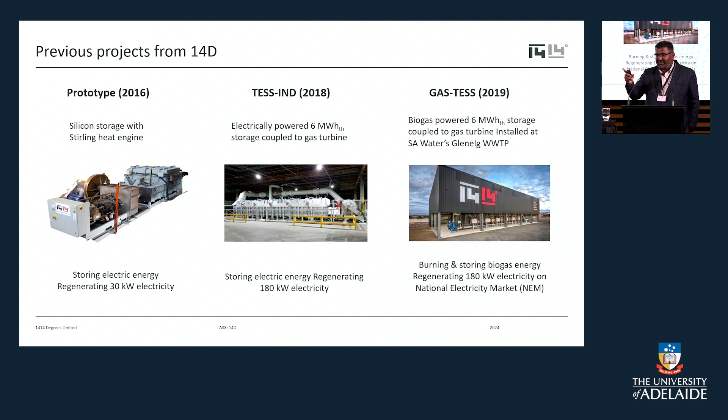And that's where the hero of the day comes into the picture: the SiBrick. I have a quarter brick, which is easier to carry, still quite heavy. The full-size brick weighs about 6.5 to 7 kgs; the one I have is about 1.5 kgs. That brick is a form-stable brick which contains a silicon alloy inside, which undergoes melting and solidification. The outside still remains the same and looks like a refractory brick, and it holds its shape. That is what our core technological development has been.

The SiBricks can be used in many different ways. The first is your hot gas generator, a typical use case where you provide heat to industrial processes directly in the form of air. We moved away from the original concept of using nitrogen as a heat transfer fluid. Air, at the temperatures we're operating at, is one of the easiest available and best integration possibilities for our industries. So this SiBrick is compatible with air as a heat transfer fluid as well. We've been able to prevent any reaction between the air and the storage material, pure silicon or a silicon-based alloy - we've avoided that interaction completely.

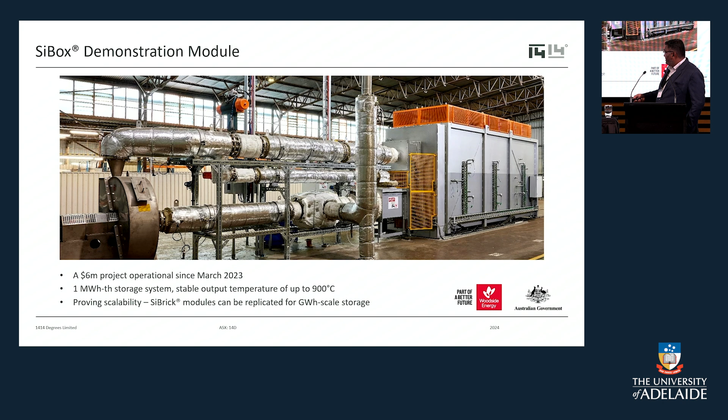And this is at a 1 megawatt hour capacity. This is still in Tonsley at our workshop. You guys are welcome to visit it. This was funded by Woodside and the Australian government through the Modern Manufacturing Initiative grant.

I'll show a couple of results from the box. So what you have on this slide is the same box being used to provide different outlet temperatures from 700 degrees to 900 degrees. The limitation on the 900 degree is not from the box or the bricks. The box itself is capable of providing much higher temperatures than that.

It's the heat exchanger, which is mimicking the customer process for us. That is a metallic heat exchanger. Everything is easy and nice and cozy when you can use metallics. As soon as you go above that, things become super complicated. So as you would notice over there, throughout the discharge period, the variation in the temperature at the outlet, measured at the heat exchanger where the customer process is, the variation is less than plus minus 2 degrees.

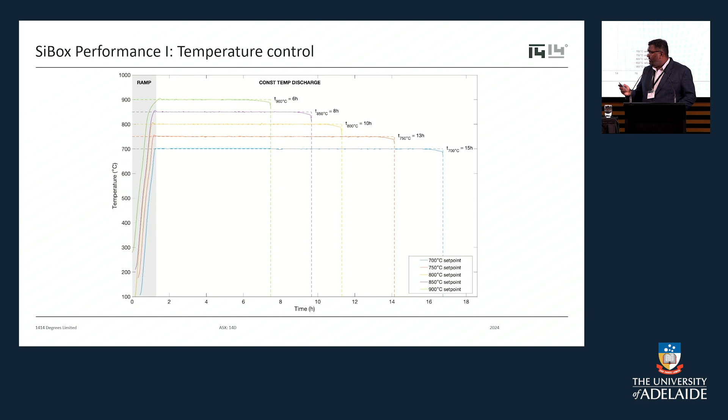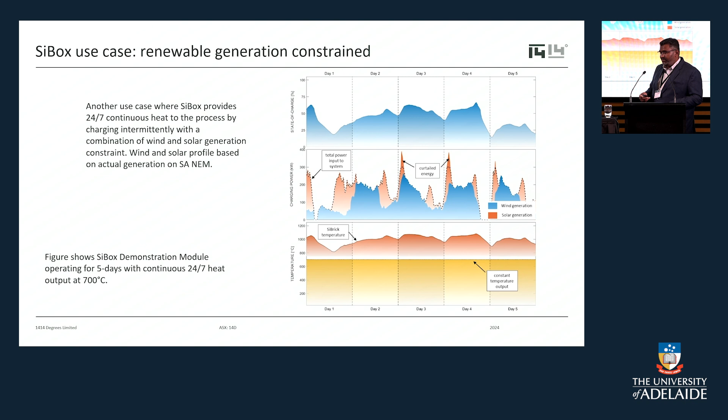Another use case over here was coupled to a profile where the power supplied to the system is in the form of a renewable energy curve, so the wind plus solar generation from an actual week in South Australia, and we were able to provide heat from the box 100% of the time. I'll cut through all of this in the interest of time.

I've run out of time here. Just wanted to quickly highlight a new project that we've started, which is on the hydrogen production side. So I mentioned that these bricks can actually be used in integrated reactors as well. So for that use case, we've just started to work on this project called CYPHER. CYPHER stands for SiBrick Integrated Pyrolytic Hydrogen Reactor.

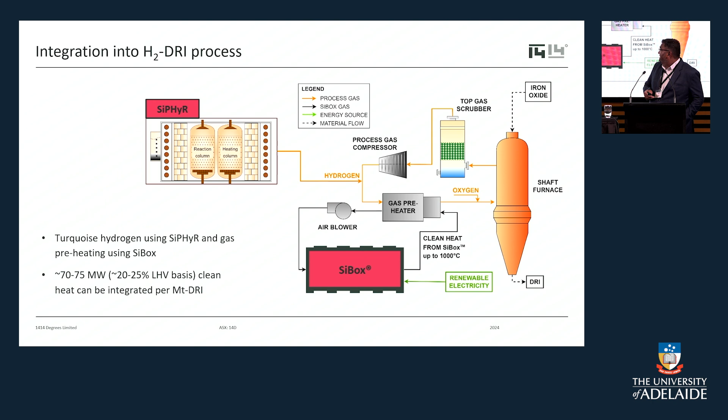It is a CRCP funded program in which University of Adelaide, RMIT, Kanthal, and Woodside are partners with us. And we would be demonstrating the hydrogen production in a liquid catalyst at about 1 kilogram per hour scale in the next 2 years' time. Thanks very much.